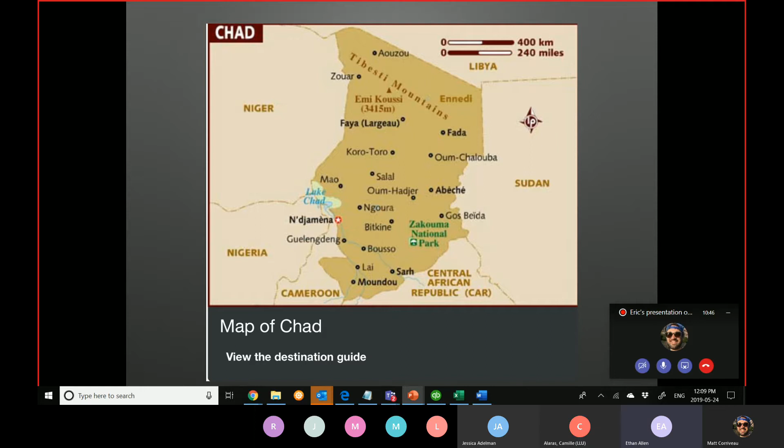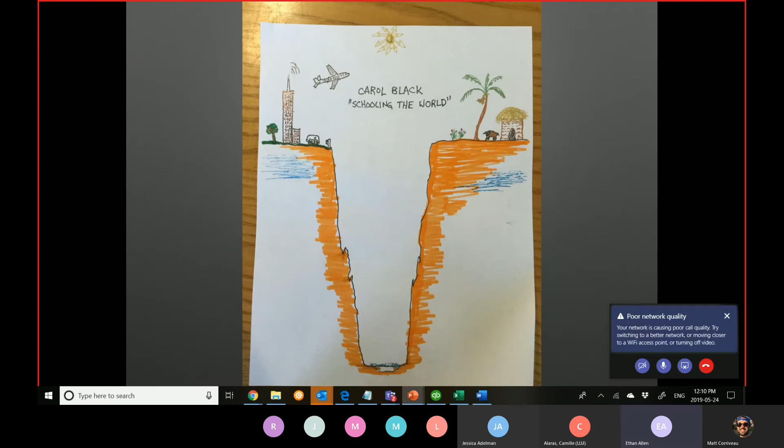And this is something I drew up showing the real sort of Grand Canyon gulf between an agricultural-based, oftentimes nomadic culture that has existed on a marginal landscape for thousands of years and figured out how to actually survive and thrive and build a culture around that. And then our culture, on the other side of that vast gulf, suddenly zooming in there with all kinds of solutions.

So I'd like to talk right at the beginning, speaking more to my own colonial self here, and to any of the rest of you, because I think it's very easy to assume that we have the solutions because we're part of a dominant culture.

One of the things I find really interesting in Scripture is that it speaks of God, or however you want to conceive the basic underlying reality of the universe, as having caused the rain and the sun to shine on the righteous and the wicked equally. That is the perfection of the Father. So what we see here is a graphic showing that from God's perspective, there is no difference between the righteous and the wicked, and we might ask ourselves which ones are the righteous and which ones are the wicked here.

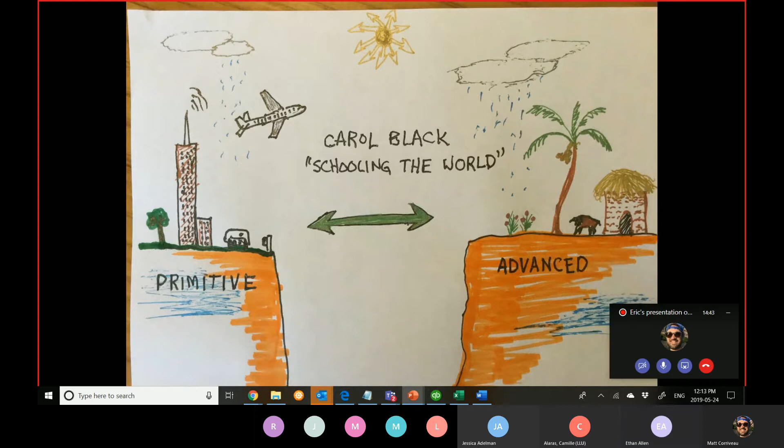I'd like to speak briefly to the issue of charity versus solidarity. A perspective of charity comes from a dominant culture assisting a culture perceived to be behind or less advanced. Solidarity is always a two-way street in a relationship based on equality. So if we look at our culture and our industrial way of living in comparison to a culture that has built thousands of years of tradition on existing and thriving and surviving in a marginal landscape, we would have to ask ourselves which one is the primitive one and which one is the advanced one, and walk into the situation accordingly.

This is a quote from Rachel Held Evans, peace be upon her. She quotes Jesus here giving his mandate, what the Spirit of the Lord has anointed him to do: to proclaim good news to the poor, proclaim liberty to the captives, sight to the blind, and liberty to those who are oppressed.

And Timothy Keller's response is very interesting. Right away, he says Jesus didn't come primarily to solve economic, political, and social problems of the world. He came to forgive our sins. So as we carry on into this, I'd like us to think about what sins he might have come to forgive, and maybe some of them are ours.

We arrived after an 8-hour bus trip from the capital in a place called Kalo, and there's another what feels like 2 hours of bumpy road, which Marcy assures me is only three quarters of an hour, 45 minutes. We had 12 pieces of luggage, and Marcy says, well, here's the 3 motorbikes, we're going.

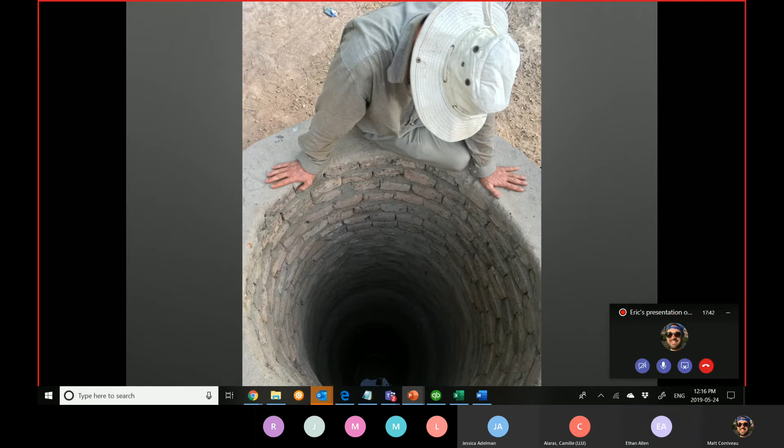This is a typical hand-dug well. You can see the reflection at the bottom there. There's water. The static in this is probably between 20 and 25 feet. I didn't actually measure it because we didn't have the dipper tape. And you can see that it's cased for about the first 10 feet with brickwork, which I presume is because the soil would collapse. But it's a semi-soft sandstone below that, and it's just open hole.

And this particular well had about 6 inches of water in it at the very end of the dry season. And that water was full of bugs, turbidity to the level where you would almost call it mud. And we pulled up a bucket full of it and a frog jumped out. The frog brilliantly jumped out of the bucket and fell all the way back down to the well. I think he knew he was toast if he stayed on the surface.

So this is a typical India Mark II, which is the ubiquitous hand pump throughout Africa. Reese estimated that there's literally millions of these around Africa. They're built in India and they're super strong and robust.

And I believe that the keyhole shape of the cement is to protect the wellhead and to allow any sort of recharge of the aquifer to be channeled away from the wellhead and allow it to percolate back down into the aquifer through more of a formation, a cleaner formation where it doesn't have any of the residual effects of the drilling.

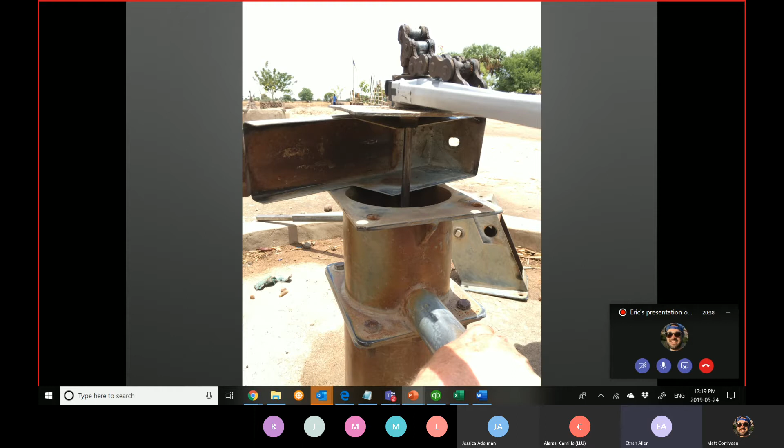Also in this picture, it's nice to see the iron staining. Pretty much all of the wells that we looked at had the same kind of iron staining due to soluble iron in the water.

This is Naomi, who is the head of the community health rep program, and she speaks good English and she's absolutely amazing. This woman does wonderful work, and teamed up with Marcy, these 2 women will definitely change the world.

What is she doing with that? What's going on? That's a LifeStraw, and I think someone donated a bunch of them to Marcy's project, and it allows you to basically suck any liquid and not kill yourself. So if you're in a survival situation and you find a little mud puddle and you're dying of dehydration, having one of those could literally save your life.

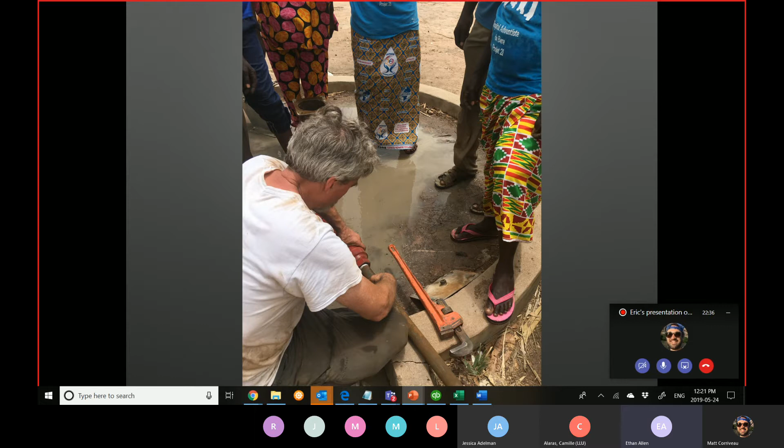I was so flustered by my incompetence and not knowing what was going on. Often I was trying to pull the wrench in the wrong direction and feeling like an idiot. But in the end, everybody seemed to be happy with what it was, and I felt like the great expense and my travel all the way there wasn't a total loss.

So I just want to finish up with some discussion of ways we can help the situation in Chad. I found this quote: when you start with an understanding that everyone is your neighbor and we're all equal, justice is not far behind. So I think that's a kind of guiding principle.

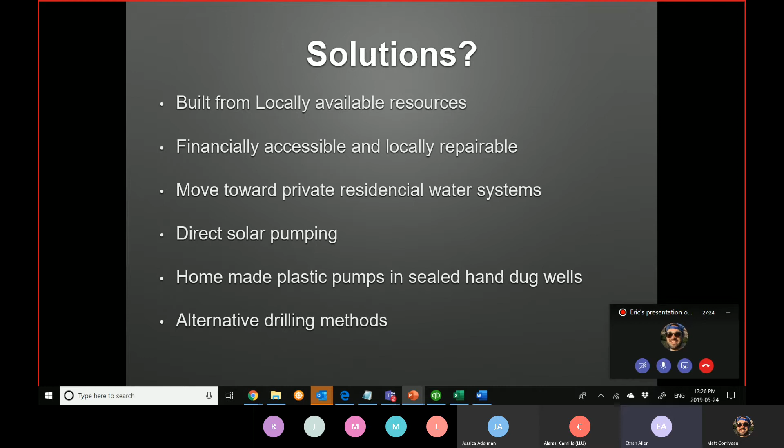I'd like to talk about alternative drilling methods, because Lee and I are super psyched on that kind of stuff. There's an organization in Zambia called Smart Centers — it stands for Simple, Market-Based, Affordable, Repairable Technologies. This is one of their super simple well drilling ideas.

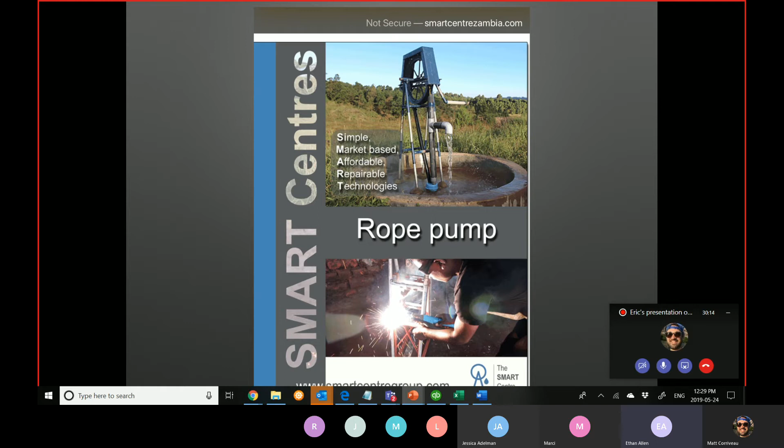This is a rope pump, which gives a lot more volume, liters per minute, than say the India Mark II. The problem is that it's more easily contaminated because the rope circulates in a loop up through the pipe. But this would be really appropriate in projects for agriculture and watering gardens in the rainy season. It's really home built, simple, accessible technology.

There's also the straight-on post-hole digger approach. There's a website called emergencywaterwells.com, and the guy claims he can put a 50-foot well in and complete it in 2 hours using this technology. I imagine that's in perfect ground, but you can see it's very affordable.

Then there's the Baptist method, which is one that I really admire. It's a check valve and a casing that comes all the way to the surface, and then it discharges out the surface, so you don't have to pull the whole thing out every time. You can see that arrow-shaped thing is a check valve that both drills and...

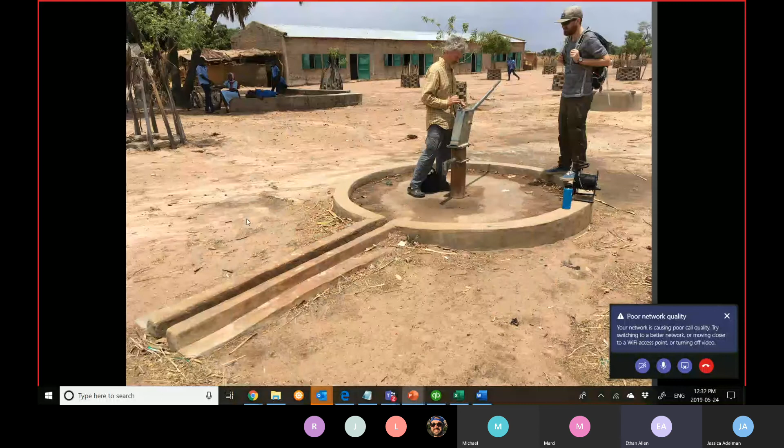So as the drills get heavier, you can use it, and I'm intrigued by this model generally, of local residents that would all like to have water access. They donate equipment and teach them how to use it, and then the club goes around and assists everyone within the community to end up with their own water source. So I have a lot of respect for that model.

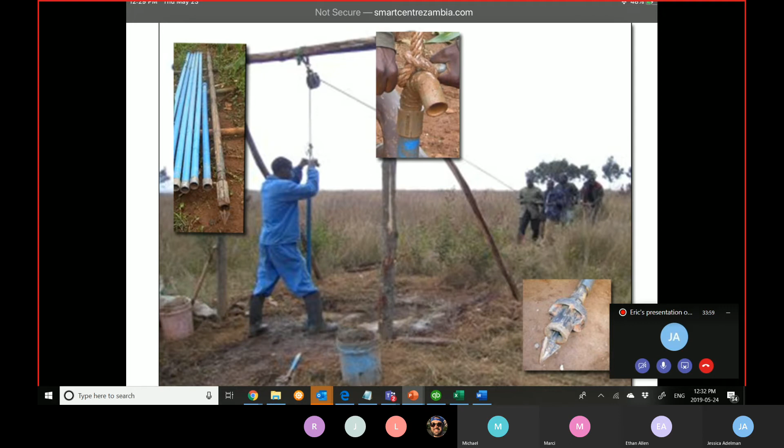This is another approach which excites me a little: the airlift pump. The drawback is that you need an air compressor, but air compressors are all over the place in Chad because they use them for tire repair. So you actually see lots and lots of air compressors in Chad, the 5-horse Honda driving it. So this is the bit.

It's a 4-inch nipple cut in half with 4 teeth welded around the edge. The auxiliary tooth you see there is to cut clay towards the center of the cutting action, and should be removed if you're in gravel or larger material.

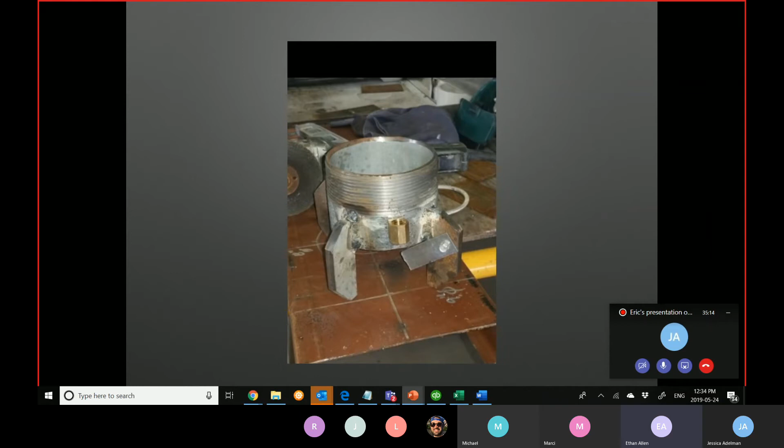You can see the fitting on the side is the airline, and it can be fitted with a U-shaped tube that goes into the bore. With this technology, you're injecting the air right at the bit, and it's essentially bubbling the cuttings and material out and up through the pipe. You can put ports in the side of your pipe that you can open and close with these rubber unions.

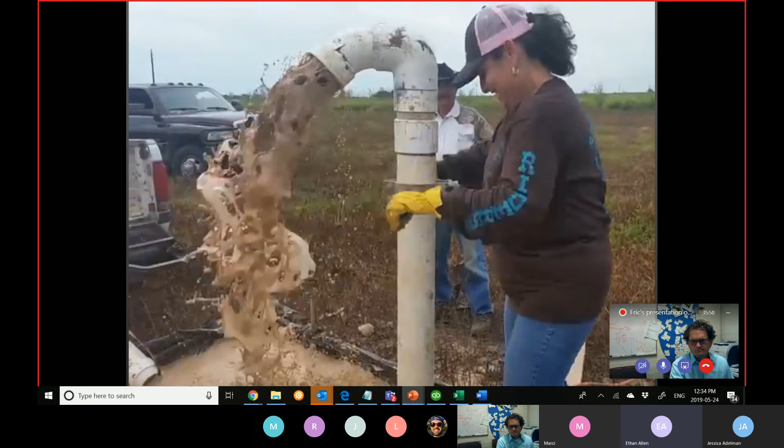So this is the bit on the PVC drill rod. This is a woman drilling with this method, and she seems pleased with the result.

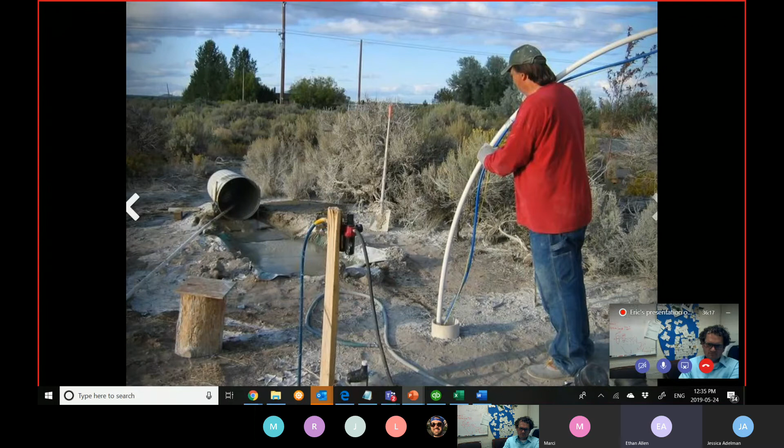This is a variation on that method where you use polypipe instead of solid drill rod, and they use an air die grinder on the end of the drill string that actually spins and drills into the formation, and the cuttings come up the polypipe and are discharged into that barrel and then recirculated.

And if you're excited by the idea of the miracle of water in Chad, I recommend watching this video. It's only 15 minutes long, and it's elegant and will fuel your psyche for helping out in Chad. That's all I have to say.